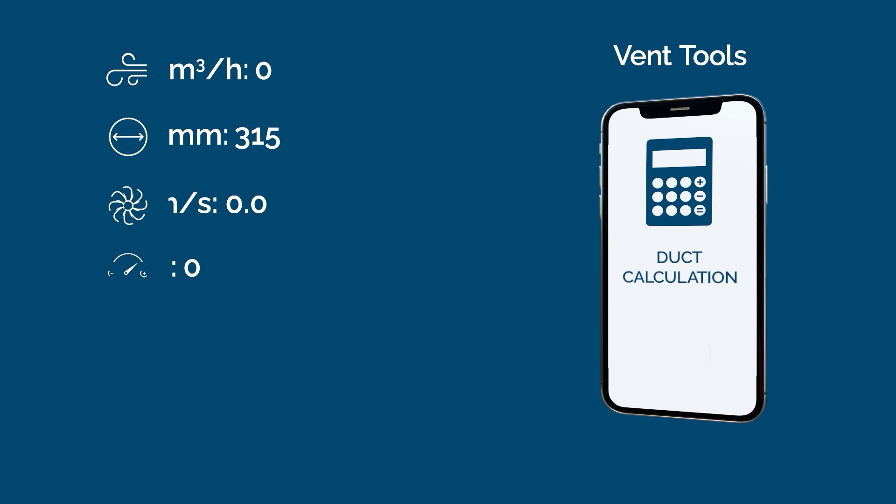Hello, my name is Jan Behrens, and today I'd like to show you the new duct calculator from the Vent Tools app. The duct calculator is a small part of the Vent Tools app. It is a selector to find the optimized duct sizes that are easy to install and energy efficient.

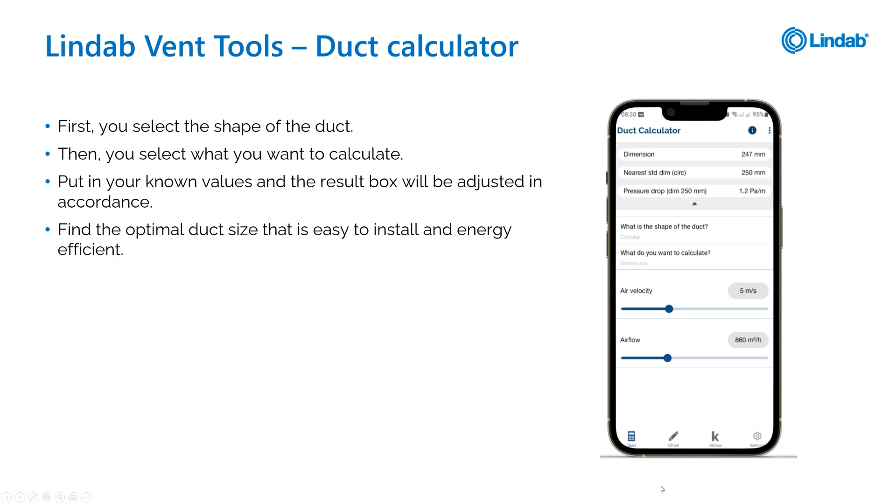The way to do it is really simple. First, you select the shape of the duct, then you select what you want to calculate, and finally, you see the result in the top right corner. Finding a duct is really simple. You need 3 out of 4 pieces of information: the airflow, the air velocity, and then the dimension and shape. If you know 3 of these, then you can use the duct calculator.

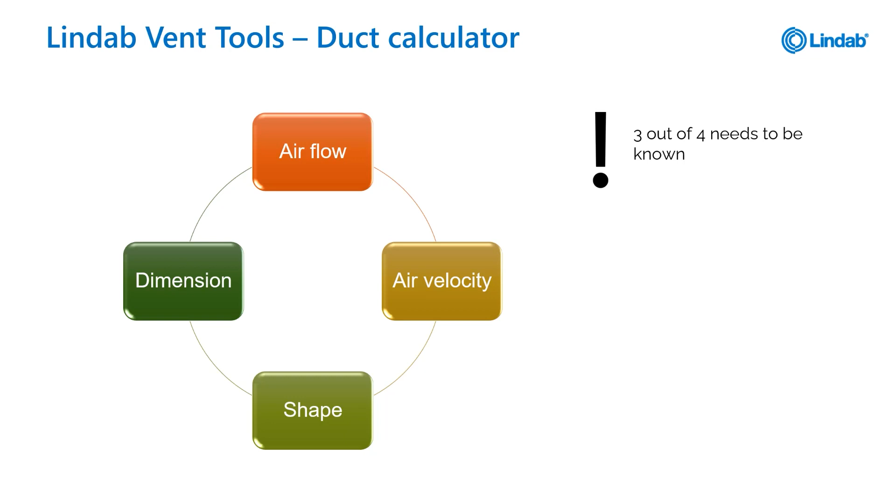I'd like to give you a sample. This is a small building. There is already a room stamp here, and each room has a specific airflow. What we know is we want to use round. As long as we can use a size of 300, we want to use an air velocity in the ducts of 4 meters per second, and we know again the airflows from the rooms.

This is the duct line. We want to go up in the blue line with the supply air, and we want to use the yellow lines for the extract air. And then we have some overflow of air into the corridor. So finally, what we do is we take the airflows from the given drawings, then we use the duct calculator.

First, we type in what is the shape of the duct. We select the circular duct here. Then we say what we want to calculate, which is the dimension. Then we can use a slider to select the airspeed, or we can type in the values that we want by typing in the field. Here, for example, the airflow, you can type in directly on the airflow, and then you give in the number, in this case, 480 cubics. The result is seen in the top right corner.

If you use the drop-down menu, you can see the nearest standard diameter in round systems, which is in this case 200 millimeters. And if you use the extract duct with 460, type in the 460 here, we can see that we use the same diameter. So in both cases, I would use a duct size 200. Okay, we take the 200 millimeters.

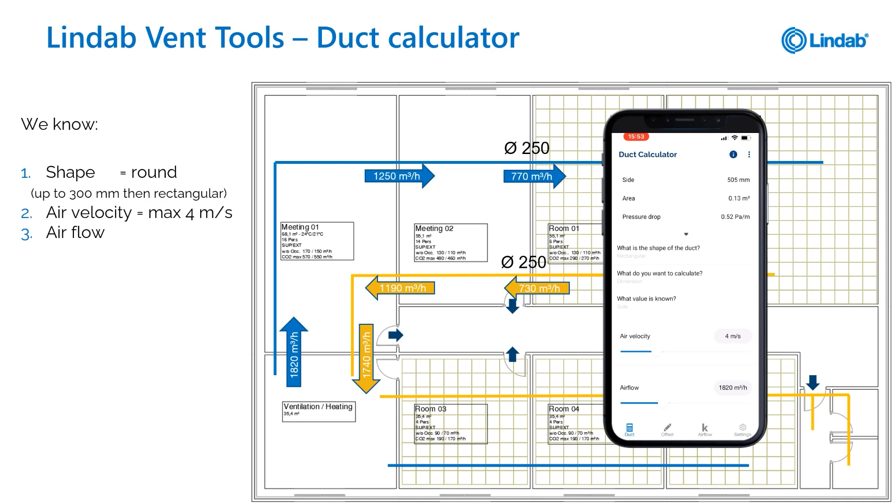Immediately we get a size which is 505 millimeters in the top right corner, and then we say it's 505 by 250. Now we can use exactly these given ducts here and type them into the project. So finally, if we have done that for the whole project, we have everything we need to design the system. The sizes are given and the airflows are given.

That is what the duct calculator is doing. So therefore, enjoy using it.